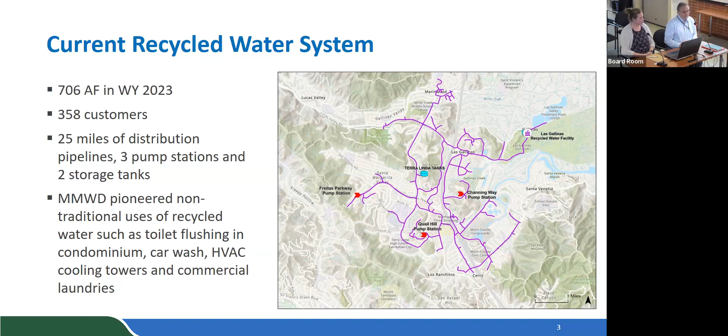The 7 million gallons we see annually is carefully phrased as 'up to' — that reflects a drought year usage for us, about 20 acre feet or so, to give you some context. In a normal year it's probably less than half of that, somewhere in that range. The uses include dust control, sewer flushing, and so on.

Hey Paul, on this program, do we have mandatory truck hauling for commercial customers? We do not have mandatory truck hauling, but I think at the end of the last drought, some uses like dust control may have been kept in the recycled water area. So a lot of contractors have been using recycled water where they can. It's obviously not available everywhere, and there can be some hardship applications and variances.

So just during the drought we implement that, or? Well, dust control and certain aspects the state retained after the drought, so there are some uses that have been added. But it's not a huge volume for us.

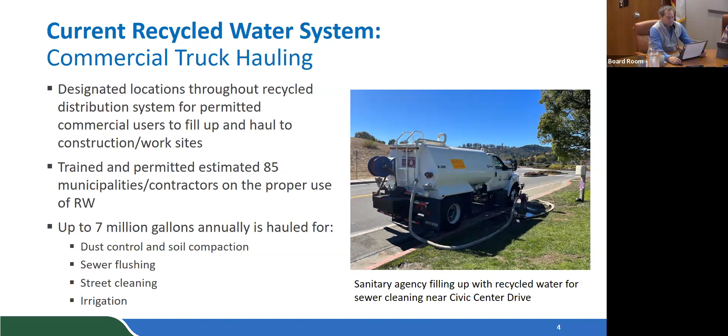In addition to our commercial program, we have a residential fill program that we sort of broke out during the drought. It's really a drought response tool for us. This was all designed and installed by staff with permitting and assistance from the regional boards. In 2021 and 2022 it's about an acre foot of usage, and you can see the number of trips there. In most years, about 100 customers are responsible for all of these trips.

We have far more licenses or permits that we issued to be able to pull this water, but sort of a regular customer base of around 100 or so folks.

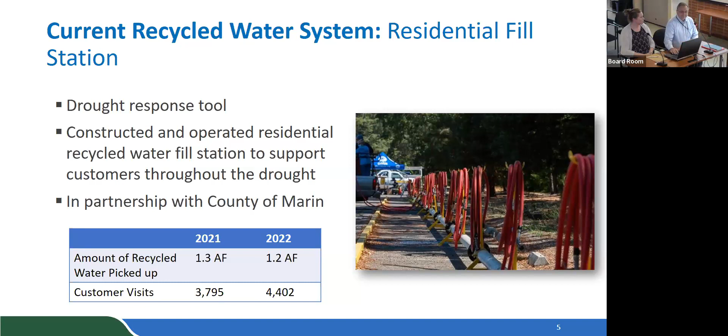And Paul, that site requires staff to be there to actually maintain it or use it. Yes, staff is there for traffic control and setup, and it's a bit impactful for the county, so we close it down during the fairs and things like that. It's designed to be taken away, and we can store it and put it back when we need to. But it was certainly very popular.

So that's kind of a snapshot of the system. We've got distribution piping, truck hauling programs, and we're always asking ourselves: how do we increase the use of recycled water in our service area?

I think about it in terms of three buckets. One is adding new customers to the existing system — that pipeline network in Terra Linda, as we hear about customers that have a project, maybe they already have irrigation with recycled water on their property, and they're adding toilets or something, and it's an opportune moment for them to start flushing toilets with recycled water.

The other way is expanding that existing system, moving that purple pipe further out into the neighborhoods. Both of those first two ways are essentially leveraging the existing system. The third way would be creating a whole new recycled water system from a different source, so we've looked at options from Central Marin Sanitation Agency, and of course from the Sewerage Agency of Southern Marin, and we'll talk a little more about that.

I think you should probably either refer to or distribute to the board the map that shows the nine areas for recycled water.

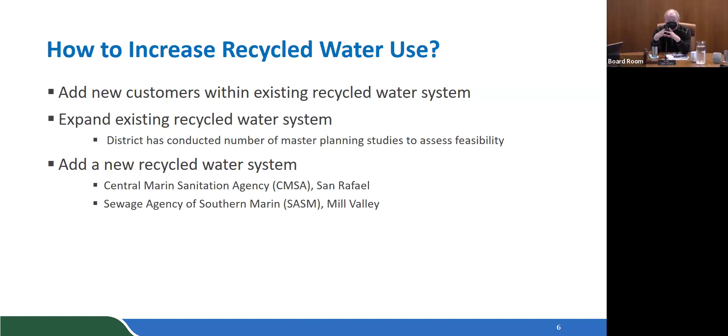I don't know if they're familiar with it or not. It's the same map that existed when I first joined the board in 2004, of which one zone is done, the one in Central San Rafael and the Civic Center area.

Yeah, we do have that coming up in a moment, as we talk about the next step, which was a larger phased approach to expanding the recycled water system. So the types of projects, just a smattering of them here, are infill type projects. Terra Linda High School already irrigates with recycled water and they're adding some toilets, so it's a good moment for them to start doing that. And there are a few others listed here.

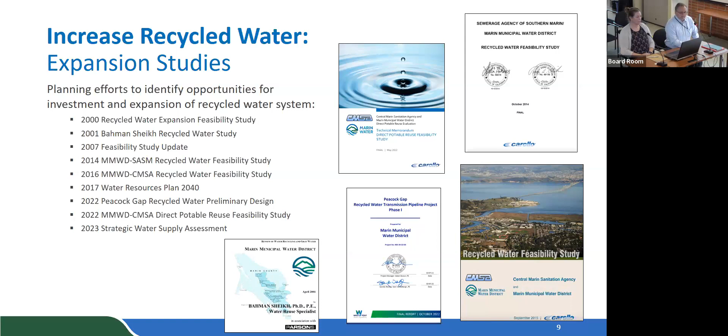As I mentioned, we feel like we know our recycled water system fairly well. We've looked at it continuously, at least in my tenure here, which is reflected by these studies. The first one, as Director Russell was talking about, was in 2000. More recently, you can see we've taken a pretty good look at different options for recycled water in the system, most recently as part of the 2022 and 2023 MMWD CMSA DPR study, and then the Strategic Water Supply Assessment as well.

FYI, Steve Moore was pushing on me the other day. I had lunch with him and we were talking about the CMSA stuff. So they're hot to trot.

General Manager Horenstein was recently visiting over at CMSA and gave them a review similar to this, but maybe not quite as detailed.

As we look at increasing recycled water use in the area, as Chair Russell indicated, this map's purple section is our existing system, already built out. These other expansion phases—there are actually 21 of them—each a discrete phase where they went through and looked at the alignment for pipe, size of pipe, number of customers, and demand on that particular segment of pipe. Those all get added up and collated into the table you see below, broken out into phases 1 through 10 and 11 through 21.

You can see the challenges: they're long pipelines for us and fairly high costs. When you don't have those big anchor tenants, it's difficult to drive the unit cost to comparable or supportable numbers. We'll see that as a common theme for our purple pipe projects.

Paul, just on that point of anchor tenants, would San Quentin then be the largest potential user of recycled water as a single customer? Generally, the golf courses use a bit more—so Peacock Gap would actually have the largest use. You'll see both of those are fairly close in a minute.

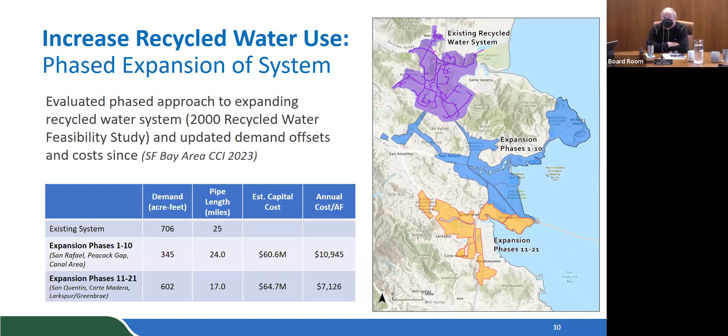Yeah, it would be super helpful, though I'm not sure we get a lot of support for a refinery in our service area. But for recycled water purposes, it would be fantastic.

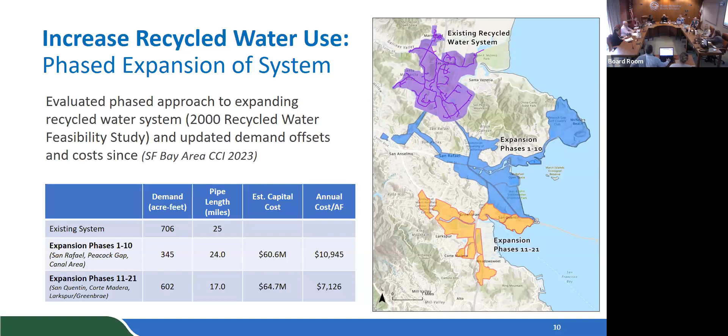Paul, on the annual cost, I'm assuming that includes some amortization of the capital investment as well as the ongoing operational requirements and then the pumping costs. Thanks for that question, it's an important one as we compare project to project. It's typically a 30-year lifespan, and you select your percentage. At the moment these are reflecting 3.75%, which may be a bit optimistic, but these are 30-year projects so you may have the opportunity to refinance them. It does include capital amortization and O&M costs added together, and then the annual water demand, that's how we try to normalize these unit costs.

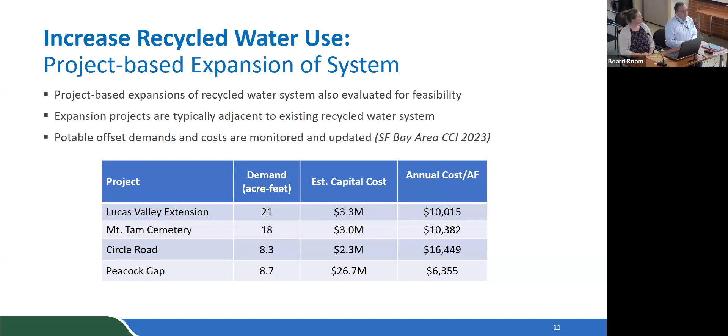I think we'd need to do some analysis on that. Most likely it's going to fall into that providing water outside of your service zone area, so there are a few boxes we would need to check before. Yeah, because the district ends pretty close up Lucas Valley, as I recall. Yeah, we don't serve much out there.

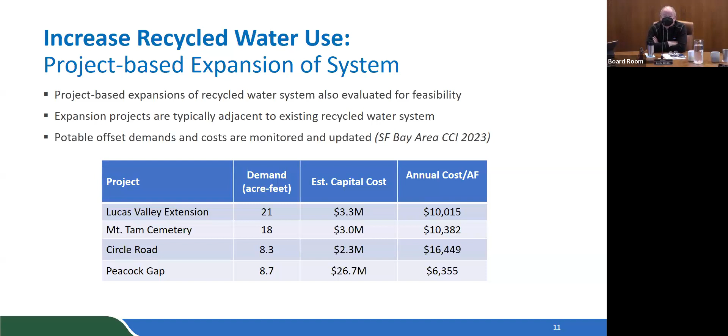So on a project by project basis, we've looked at pulling those out. Each of those projects represents, as I said earlier, us looking at the project, thinking about different alignments to see if there are ways to capture different volumes of water to help offset the costs. For Peacock Gap, going to the golf course, the shortest route has maybe the least demand, right, you're going down Point San Pedro Road. There's just not a lot of use there, but it's the shortest route.

So how did that compare? In the end, the engineering team looked at the orange route, the south route we call it, which goes through San Rafael because we can pick up the most water. I think there's less environmental challenges along that way too, because putting the pipeline out on North San Pedro Road could be problematic for us in that area. So there are a lot of things that go into each of these project considerations, and the economics you can see here, we've talked about that already.

Did we get around the Native American burial issues in China Camp? No, I don't think so, they still want that causeway. Last I know, their intent was they're looking eventually to make that roadway, lift it out of the marsh so the marsh can connect on both sides of the road. Especially if we pay for it.

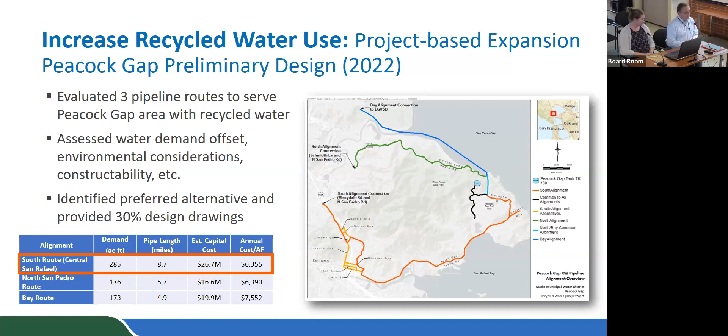So then looking at creating a new recycled water system using a new source, so from CMSA, the Sewerage Agency of Southern Marin down there in Sycamore and in Mill Valley. Here's the San Quentin project, Director Cush, that came out of that CMSA feasibility study. It's about 150 acre feet of water, the updated capital costs. I think the study was done in 2016 for that one. The SASM study was maybe the year before, 2014, something like that. And you can see the unit costs there.

So they're still relatively high, though these start to become, if you could think about a grant of 50% or more, if we could get some state grants, some federal funding, you can start to see economic unit costs coming into comparable range with other water supply options. But that's not DPR, right? No, this is just supplying recycled water, just for toilet use.

This would be toilet flushing essentially at San Quentin, and similar irrigation on the SASM side. You can imagine the capital cost of getting in to do that retrofit inside the prison. It's very difficult. There are also something like 6 houses on the entrance road to San Quentin that we serve.

I remember when I pushed real hard on the DPR side of providing the prison, two things stuck in my mind. One, those 6 houses didn't want to be on the DPR, they wanted to continue with their service. That was something that could be worked out. The second was that I was assured the district could be sued by the prisoners union over the implementation of DPR to the prison.

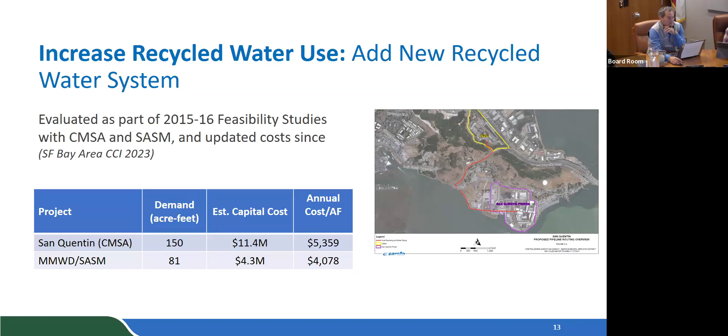So bringing it all together, this is just a summary table looking at the projects, and it just sort of drives home the challenging economics essentially for us, driven largely... sorry, quick question on SASM.

So they used to irrigate Friends Field and Bayfront Park, and what happened? Why is that not happening now? I believe their recycled water plant may have exceeded its useful life. It was run, I think, by - SASM is kind of an odd agency, sort of run by the city, but operated as a slightly different entity.

So their funding is tied to the city, and the city didn't want to upgrade the treatment facilities there. So is this $4.3 million for understanding the cost to upgrade that? Correct. And we've worked with the city on that? We worked with the agency, with SASM, on that - it was a joint feasibility study, looked at back in 2014.

Yeah, that's a plant. Have you been there? Yeah. Okay, because it's a little rough, that plant. They're doing a fair bit of work out there, I think.

So recycled water, purple pipe, as Director Smith was saying, it's a great drought-proof supply of water. There's no getting around that. It's just in our area challenging to find the usage volumes to support those capital costs, but that doesn't mean, as you saw from all the studies and all the work we've done, we don't ever stop looking for those opportunities.

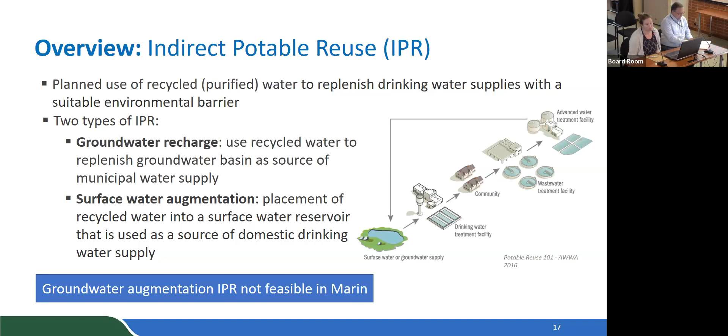As I mentioned, California has already started regulating IPR. It started, I think, about 2016, and we wanted to bring up the treatment requirements and what those are. With the pathogen control required to take this wastewater and treat it before putting it in groundwater or surface water, it's up to a 12 log, 10 log, 10 log reduction, which to those not in the water industry may sound very jargony, so we tried to put a key on the side in blue. So 1 log would be 90%, 2 log 99%. You can imagine a 12 log reduction would require quite a bit of treatment to get it through that first process and then put it in groundwater.

I think it's more useful, Lucy, to talk about the unit processes and what the treatment credits are. As I recall, filters are like 3 credits and RO is like 6. It depends on the type of treatment. So typically you may have RO, UV, or ozone, and each of those can get up to, say, 3 logs. As I've noted here, there's no more than 6 log credits that can go for any one of those treatment trains. In addition to the treatment at the advanced water purification facility, the water either goes to a groundwater basin or surface water and is required to meet a number of other requirements, like dilution, depending on what the project is. It's very dependent on the agency and what resources are around them. They're also required to have a source control program and online monitoring.

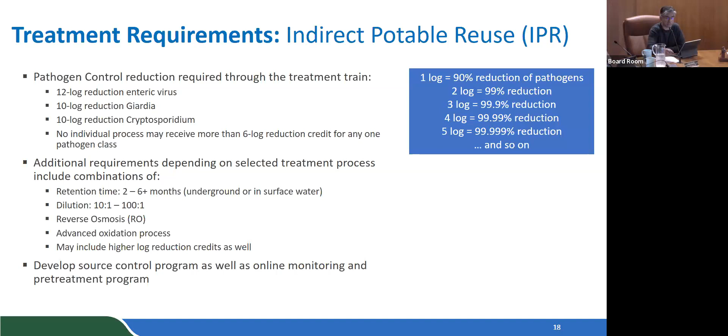But the water industry over the years has prided itself on a common sense approach. It's one of the few areas where you really see, for example, MCLs in water quality, maximum contaminant levels, are a risk-based analysis, and that's unusual. Generally speaking, why in the wastewater world, and Ben can speak to this, for example, the California Toxics Rule, which governs discharges to the environment, the detection levels in those constituents are far, far lower than what you might find in drinking water. There's a practical reason behind all of that, because if we said our water had to be absolutely pure before we could drink it, there wouldn't be any to drink. So there's kind of been, in the water industry, this practical approach to water treatment.

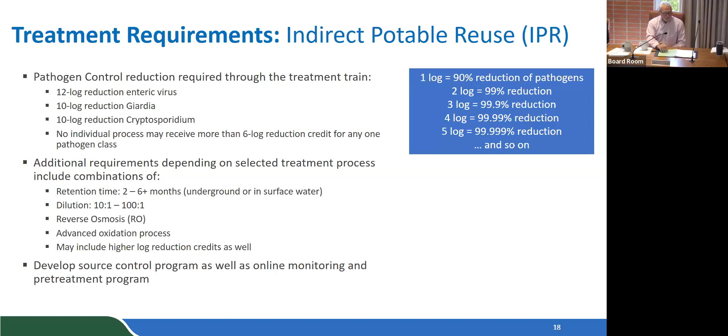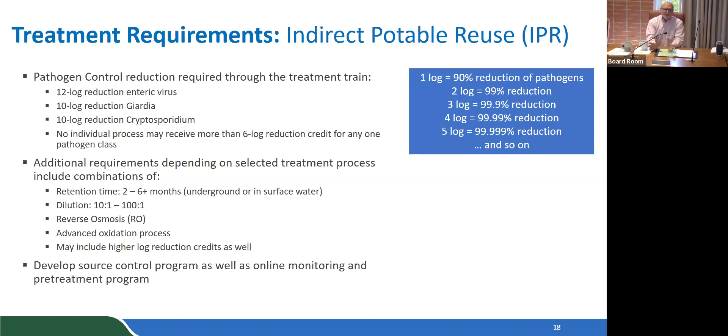And there's kind of a yin and yang to that, right? So water regulations take into account practicality and finances. The Clean Water Act does not, it just takes into account what number it needs to be, period, under strict liability. So yeah, 2 very different models. This is different, and from a practitioner's view, makes more sense. On the flip side, because dollars and practicality are incorporated into it, at times with things like DPR, you can get pushback that it's not just about health and safety, it includes these other considerations. So it's a complicated kind of paradigm there.

Realistically, the TMDL issues are far stricter than drinking water standards for aquatic toxicity. In fact, if we think about IPR putting this water in one of our lakes, potential Clean Water Act requirements on releases could be the toughest issue to deal with. Very interesting, so thank you for that segue.

Looking at how we'd apply IPR to a conceptual project in Marin, we'd use an environmental buffer such as our reservoirs, moving the water up to Kent Lake. The effluent would first be collected from the three different wastewater treatment plants: Las Gallinas, SASM, and CMSA, in order to get the most volume. We'd treat it to the standards discussed, then convey it over 28 miles out to Kent Lake, requiring about four pump stations to get it up to elevation. The reason for Kent Lake is its size.

With that, we'd hit the dilution needed, and we'd have enough retention time at Kent Lake. We'd expect around 7,800 acre feet per year, and you can see the capital cost is quite high for that — a mix of both the treatment cost and the capital cost of putting in new pipeline to get it out to Kent. We've also noted figures for continuous and intermittent operations.

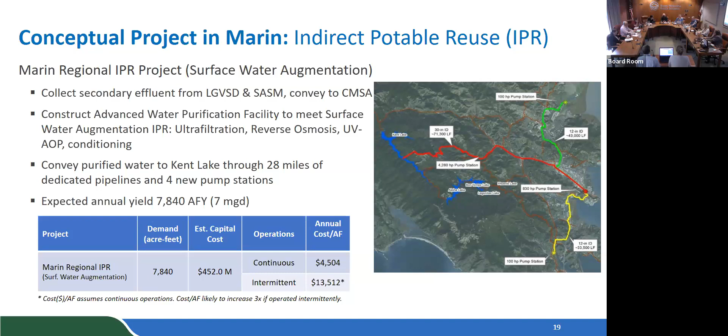There's one thing to keep in mind: Henry Ungerth, who was the state sanitary engineer for years and years, had a philosophy — which you termed overreaching, but it's really based on something very simple: use the highest quality water for the highest quality need. That's what's driving the health department. They're saying don't use your clean, fresh water when you can use recycled, as Phil Sauter and Matt have been saying. That's all true — the problem is getting it there. That's where the hard part comes.

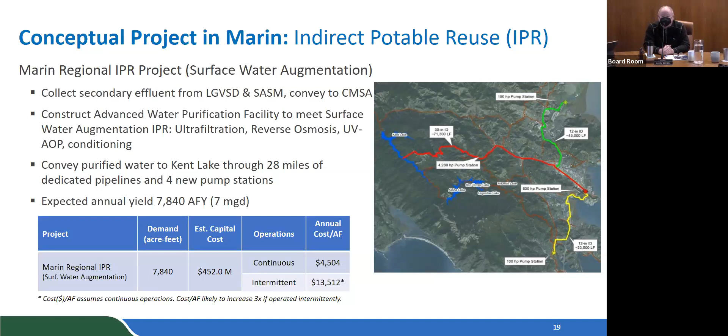As for Orange County, I don't think it's really fair to characterize it as an expansion. It's a change in purpose, because originally it was put in to hold the salt water back from the wells, but they just didn't explain to people that 90% of the reclaimed water was going into the drinking water and 10% was going into holding back the salt water. They skipped over that until the NDMA issues hit. That's a real change in Orange County, because Water Factory 21 is the first one, which is to produce the barrier, then they're into the groundwater reclaim thing, which is up the road.

Recall that San Diego gets 10% of their water from desal, and that doubled their water bills. Yeah, I know that over time the costs will change. I can't tell which way it's cutting, because the technology might make it cheaper, but obviously inflation and cost of infrastructure is going up. So anyway, that's maybe just a comment - stare into the crystal ball.

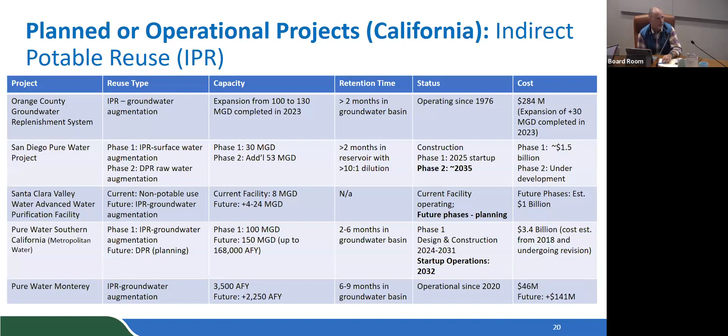Right now, they're doing a pilot plant, and final design is expected to start in the next couple of years, with startup and testing in 2032. So still very much in the planning phase right now.

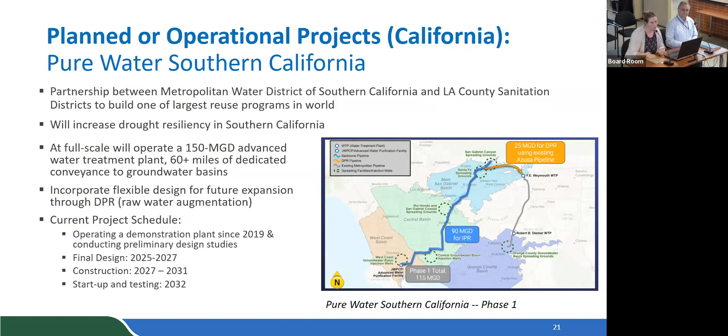So bringing it to IPR and thinking about the projects, including our own, we wanted to note that it's a significant capital investment—not only in treatment, but also in conveyance, moving the water to another location for that environmental buffer.

And then there's always constituents of concern. We talked about the treatment requirements, but there are always trace contaminants that we'll know more about over time regarding how those are removed, as well as continuous operations. So bringing that into the planning phase: how much is the cost per acre foot, depending on how often we use the plant.

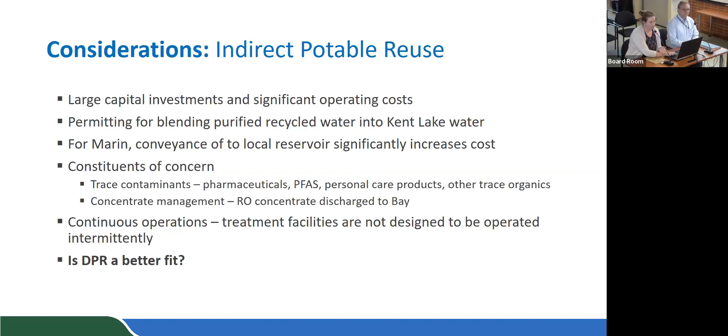Segueing now into looking at DPR, our next section. Would that be a better fit given some of these challenges and opportunities? DPR also has two categories. There's raw water augmentation, which I've been calling IPR light—it's basically still put into an environmental buffer, but not for the same amount of time required in IPR. Then treated water augmentation is much more direct into the public water system. That's more what we've historically considered DPR.

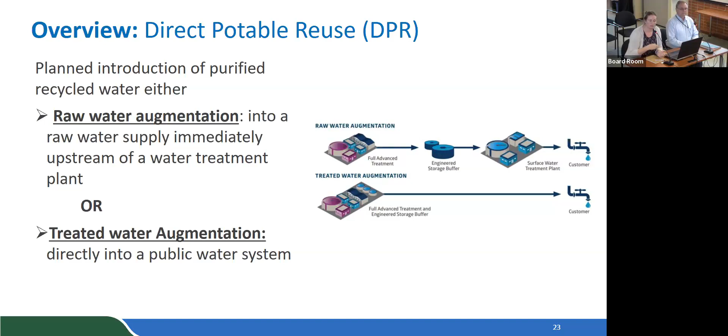Then an update on the regulatory framework being developed—it's been underway for over 13 years in California specifically. There was just a public hearing in September that was interesting to listen to, hearing some of these bigger agencies putting forth the reasons for moving off Colorado water and toward these regulations, to have more drought-proof supply available. The targeted adoption date for those regulations is the end of this year, and they expect the actual effective date to be the middle of next year.

I think it's important to realize how we got to this. The health department was holding up red flags, saying you can't go there, you can't go there, you can't go there. So finally Water Reuse Association said, hey, what's the problem? They said, well, we need these studies and these studies and these studies. So Water Reuse went out to agencies like ours—we contributed to that, we gave money to do the studies to eliminate the roadblocks from the health department.

So basically, what's coming right now is that all of these studies are done, and now they're going to have to basically go or get off the pot. That's what this is all about. It's funded by water agencies like us, who directly funded this work to stop the questions from the health department—said, no more questions, tell us what you need. Here they are, here's all the studies, and we've answered all the questions you have.

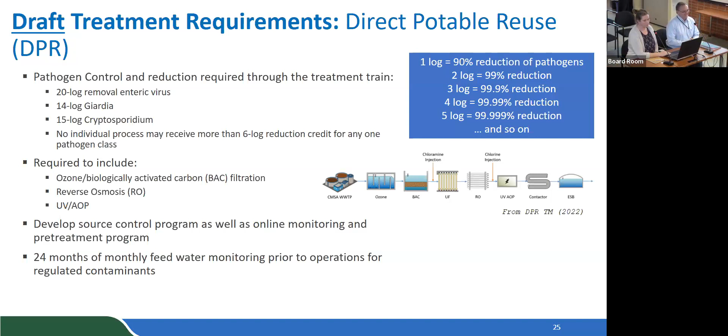But when you get to biological, experience is lacking, and biological testing takes time. It's not like shoving it in a machine and getting an answer. Right, you've got to grow them and things like that. So there's days involved, and they'll adjust the storage lag to the point they can. But what about Christmas, and what about New Year's, and what about those issues? It's tricky to have an ongoing, full-time, everything-running-all-the-time operation.

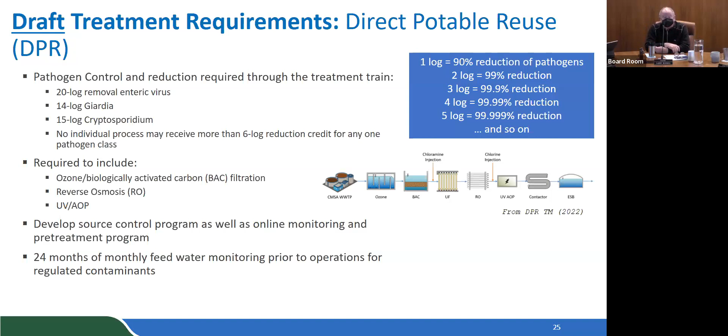Paul, just in addition to the operational requirements, the safety monitoring, the energy requirements for that type of treatment are also going to be huge. I don't know how they'll compare to saltwater desalination, but they're going to be big. So it's a lot lower than saltwater, but it's still significant. It's just one more issue we're going to have to consider.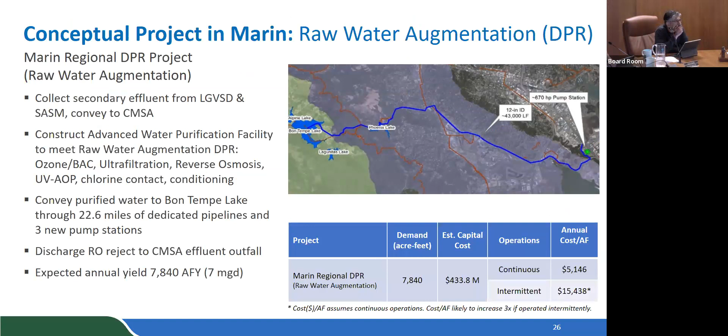So now looking at a project that's conceptual for within Marin, this would be a raw water augmentation. So what I called IPR light - this would be treating the water similar to the project from before, but now taking it to Bon Tempe, which has a smaller area, a smaller volume. So it'd be not as much dilution. And then the water would be put through our Bon Tempe treatment plant. So that's how it follows the raw water augmentation.

This one similarly is also expensive. It's a little bit lower in the amount of conveyance needed to get it out, since we're not going to Kent, we're going to Bon Tempe instead. But there would probably be a higher capital cost associated with the treatment.

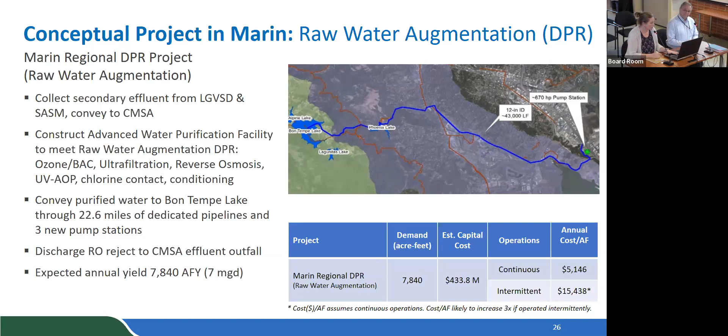And then moving into treated water augmentation, this is a conceptual project with CMSA. So you'll see this is kind of an overview, a bird's eye view of the CMSA plant. You can't see any of the markers in there, but basically this is showing a connection to our distribution system. So this would be a project in which CMSA would upgrade their facilities to include advanced water purification to meet all the requirements we just discussed, and this is meeting the draft requirements that are not approved yet.

So for right now, what we're estimating, based on the study with Carollo about a year ago, is about 125 million. We've incorporated that continuous intermittent range, just considering these are still membranes and how that may impact the overall cost per acre foot. And this project would also only be using water from CMSA, so it's a little bit lower in the amount of water we would take from them - 4 MGD.

Just a quick question - is that the minimum cost? Are there incremental steps we can take without having to do the full blown effort here, for treated water augmentation? Can you do a smaller version?

The same study did look at a smaller volume, but the capital and operating costs are not linear with volume. So generally the higher the volume you can muster, the better your unit costs are going to be - economies of scale. We looked at a 2 MGD plant, and it wasn't much different in the capital, so you might as well go for it if you can get more volume.

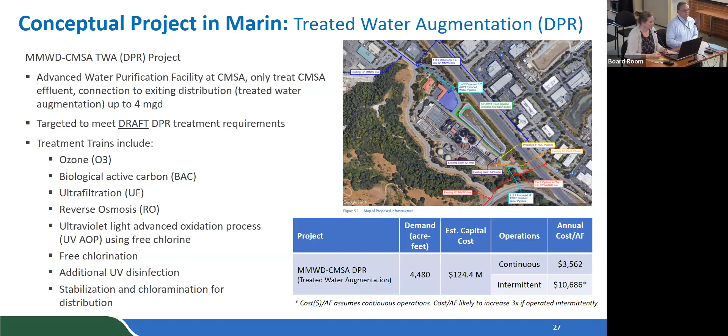And then looking now across - I was going to say across California, but that didn't work - so looking across the country and then also beyond, at what DPR projects are being planned and are actually operational. We've pulled together a list that we've heard of in the industry. There's a plant in Namibia that's actually been operating since 1968. That has different criteria than we would see in California or the US.

Operating is an interesting choice of words. And then there's also El Paso, which is working on a project for DPR treated water augmentation that they will blend with some saline groundwater. That right now is still in the final design stage, and they're anticipating construction starting next year. Although you should point out, they're already desalinating their groundwater in El Paso - right, they're already doing that.

And so it fits in with the way they're rolling. They're already spending a lot of money because the water is so salted up from ag use that it's undrinkable. I just want to note that all of this is really powerful information and a lot to think about.

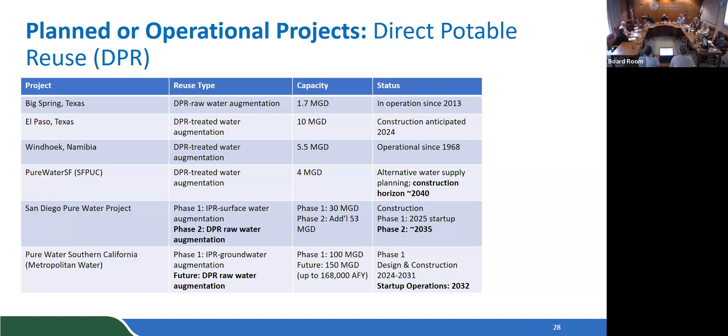Just wanted to note that Singapore has probably been doing this for 20 years now, but they don't blend their treated water with their drinking water streams. They bottle it and sell it as NEWater. It's required drinking in all government meetings, official meetings.

Singapore has the advantage of a very strong central government. They just say, we're going to do it.

I think the focus really is how we can offset some of these costs in the long term and see if there are grant opportunities with some of the recycled water to pursue.

As we reflect on these unit costs, as Director Schmidt noted, in terms of comparisons, the Sonoma water cost is about $1,400 an acre foot, and that's before our pumping and chemical additions and things like that.

So reflecting on all the options we've talked about today, recycled water is definitely something we can pursue expansions on. There's just expenses that come with it - it's an expensive, capital intensive process to expand the recycled water system. That's why we often discuss monitoring and pursuing grants in order to offset some of those capital expenditures.